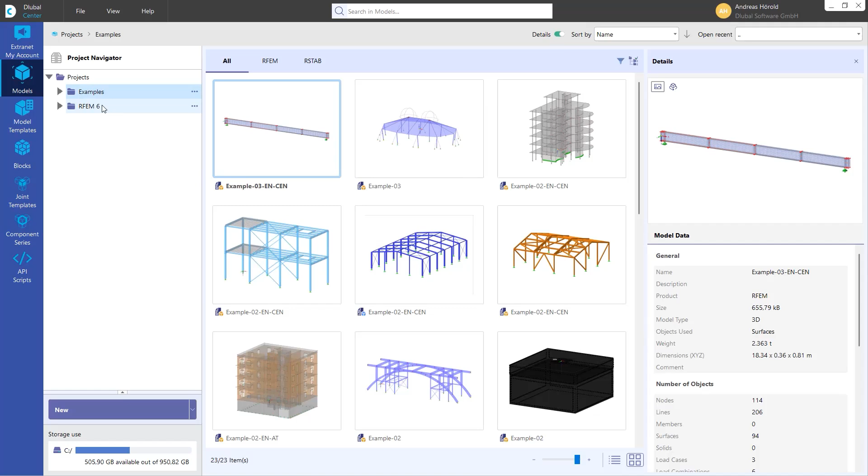The people who already work with RFEM 6 know that. I would like to give you some tips and an overview of how you can work with the Dlubal Center, and news on what we've implemented in the Dlubal Center.

Let's start with the models, the most important tool in the Dlubal Center to organize your projects. Let's create a new project with a right click on projects. I can create a new project. Let's call it example project.

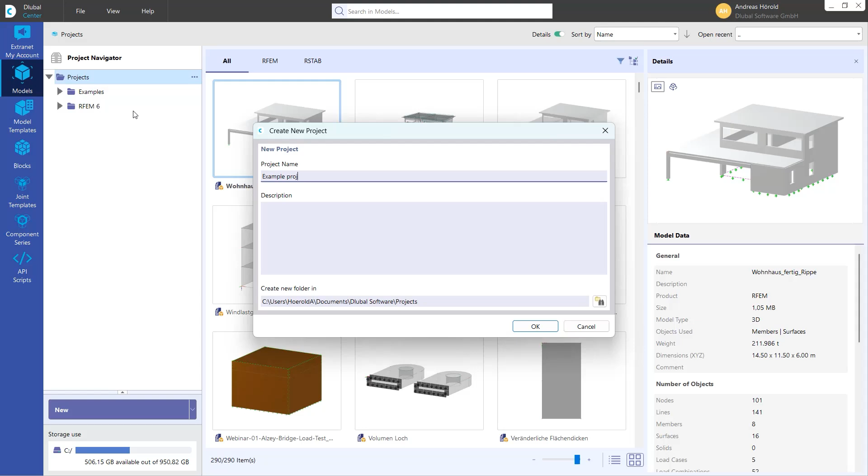Okay, that's the new project. And I would like to create a sub-project. Again, right-click on example project, then create new project, and the new project should be Model House 1. I can add a description here if I want.

So then, again, a right-click on Model House, and I create a new file, RFEM model in that case, and I call it House Variant 1.

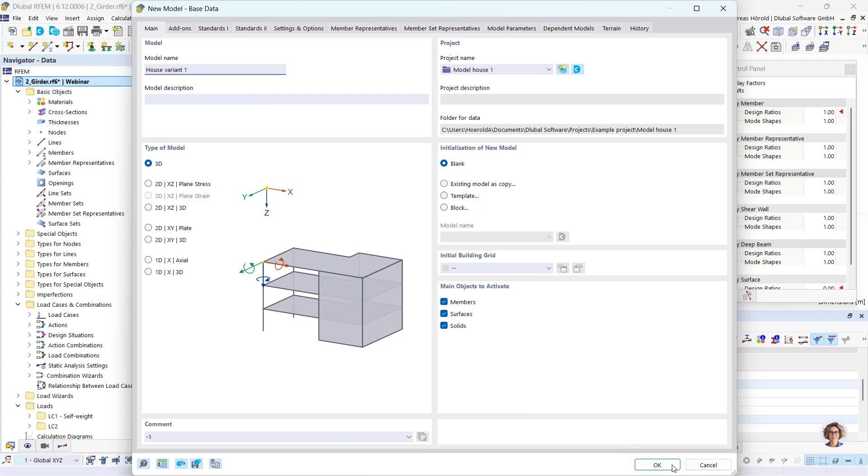Turn back to the Dlubal Center. Then you can see the file here. And if you switch to the list, you can add different columns here. For example, created in version, created by user, or I can remove them with a double click, and can add used add-ons or modified by company or created by company as you want.

Different types are available. Now you can see the added columns here. Okay, then I can open, for example, for the example project, with a right click, the folder location, and the Windows Explorer was opened.

And I can create a new folder also here. So with a right click, new folder, and I call it Model House 2. Okay, I decrease it a little bit so that we can see both.

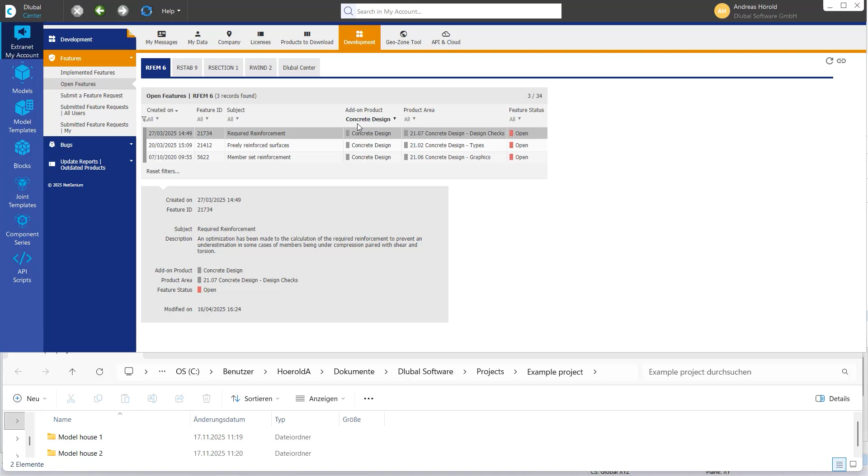Let's turn to the extranet and my account. So you can see the extranet messages here, or what's quite important, the development. You can see implemented features in a certain add-on, for example, or you can select all, then you can see all implemented features. You can see open features for certain products or all products. Then you can submit a feature request, and maybe it will be implemented in the future.

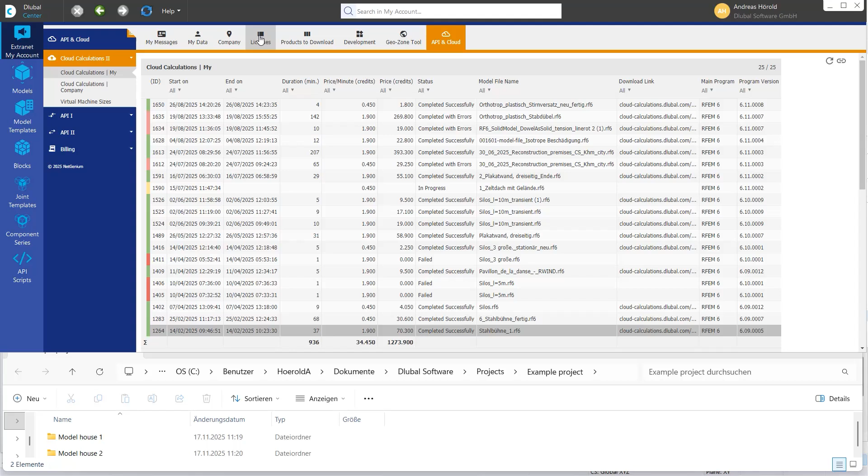Then, for example, you can see the GeoZone tool requests. Those are my requests in the past. Then the API and cloud, those are calculations from my side from the past. Then you can see here the data of you and of the company, your licenses, and so on.

Then we turn to the models and templates. The model templates category in the Dlubal Center provides an overview of the models you have saved as template files. In my case, it's empty. And an important message: the Save as Template function in the file menu in RFEM allows you to save your current model as a template.

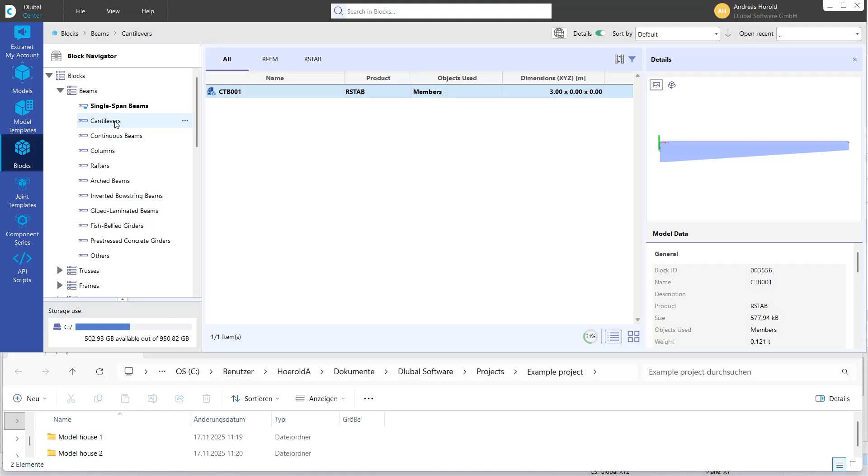Then you can see the blocks. Those are parameterized, and most of the models have parameters implemented. Let's go to this view, the tiles.

Simple models and more complex models, for example curved surfaces and concrete structures - a lot of blocks are available. Just use them, that's quite easy to handle.

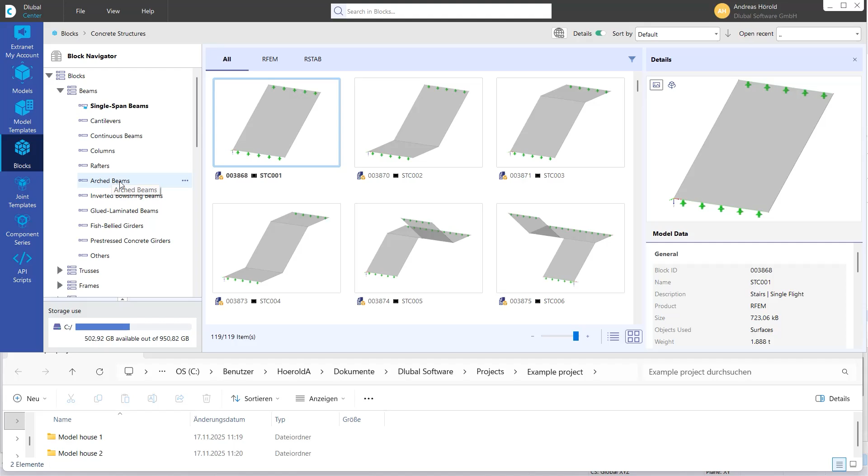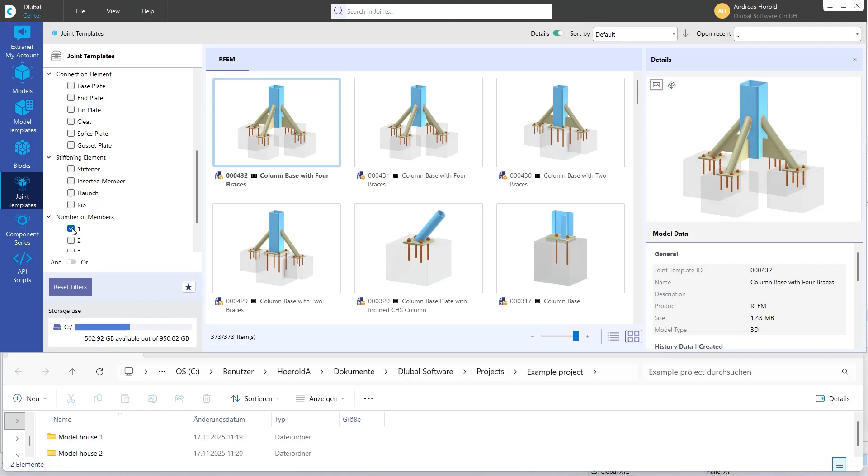Then the joint templates - you can select certain templates of joints. You can use it in the add-on, also in the steel joints add-on, for example also number of members, or joints with ribs, cleat, and so on.

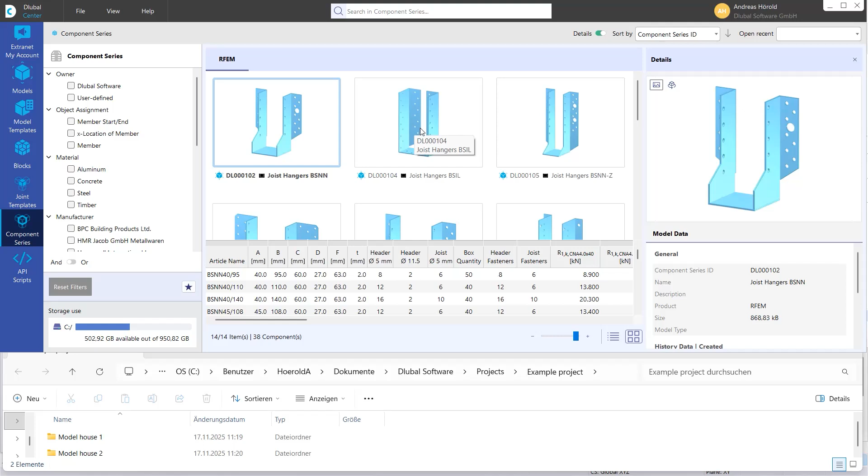Then that's a quite new part of the Dlubal Center, the component series. We are in development of the new add-on components. It's currently in alpha version, meaning it's in preparation, and in the future you can use the values of such joints and compare your internal forces with the maximum forces of the joint.

And API scripts - there are already sample scripts that you can also use for your project. Okay, that should be all for this question. Let's turn back to RFEM.

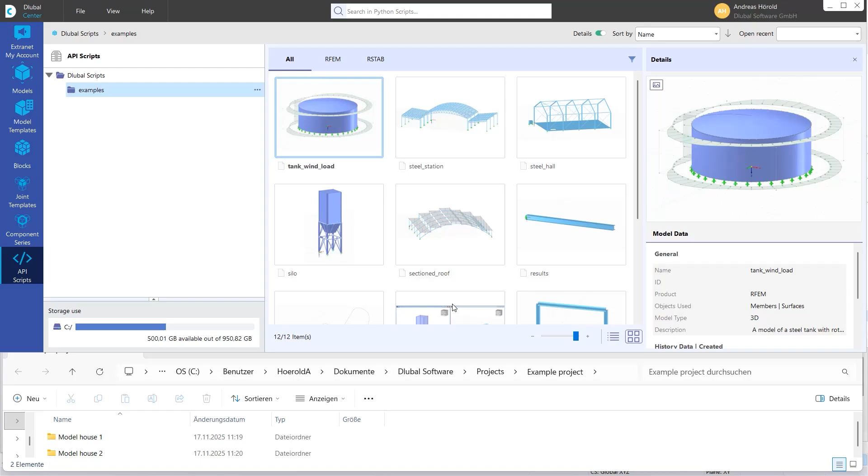The next question is: can I design longitudinal fillet welds according to Eurocode 3, Part 1-8 in RFEM 6? Yes, that's possible now. Soon we will release that feature, and I can show you how to do that. I've prepared a simple single span beam here made of a cross section HE.

180A. Imagine you need to use a girder with a maximum height of 175 millimeters. It's not possible, as you can see on the design ratio, with the HE 180A, and it's also not possible with an HE 180B. That's why we create a welded cross section.

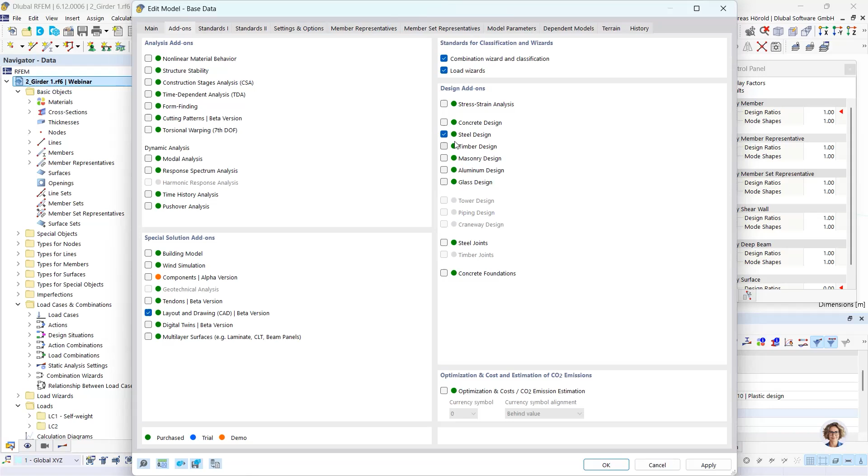At first, it's clear - I go back to the base data. It's necessary to activate the steel design for that feature. Then we create the welded section. I edit this used section.

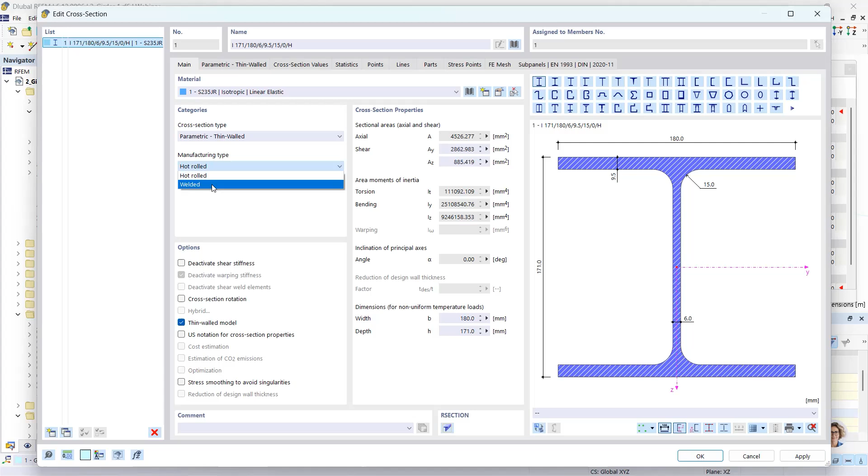I turn to the library above and I select thin-walled I section. So, before I enter the geometry, I go back to the main part here, main section, and I select here welded. Okay, then I enter the parameters.

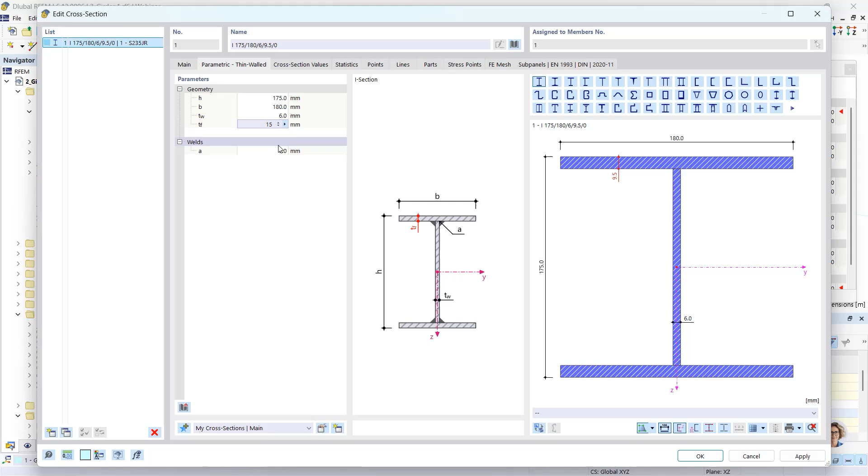Maximum height should be 175 millimeters. Then the other values can remain, but not the thickness of the flange - it should be 15 millimeters, and the weld should be 3 millimeters.

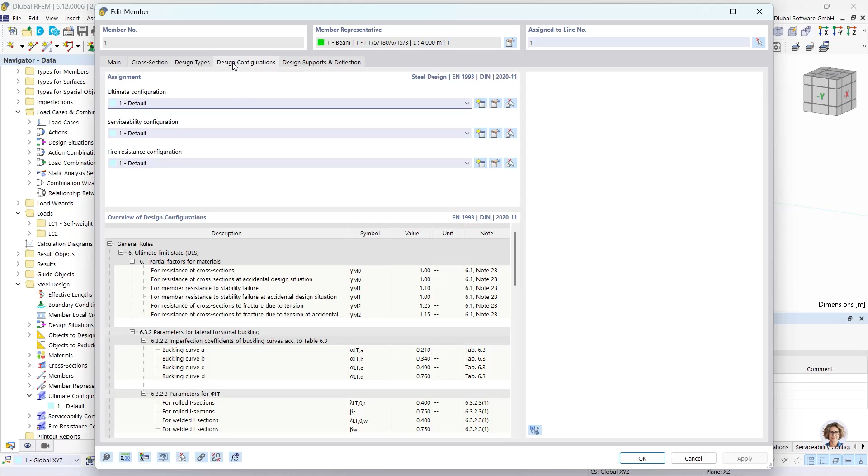Then I have to activate the weld design. I turn to the navigator data, then steel design and the ultimate configurations, default. I can turn to that chapter also when I use a double click on the beam. Then the design properties are activated and I can find the design configuration here, and I can edit it also with that button.

So then I have to activate the design of the longitudinal fillet welds. The correlation factor should be determined according to the Eurocode. It's dependent on the material, and in our case it should be 0.8 because we have material S235. And if you want, you can also use a user-defined correlation factor. In most cases, we will use the automatic data determination according to Eurocode.

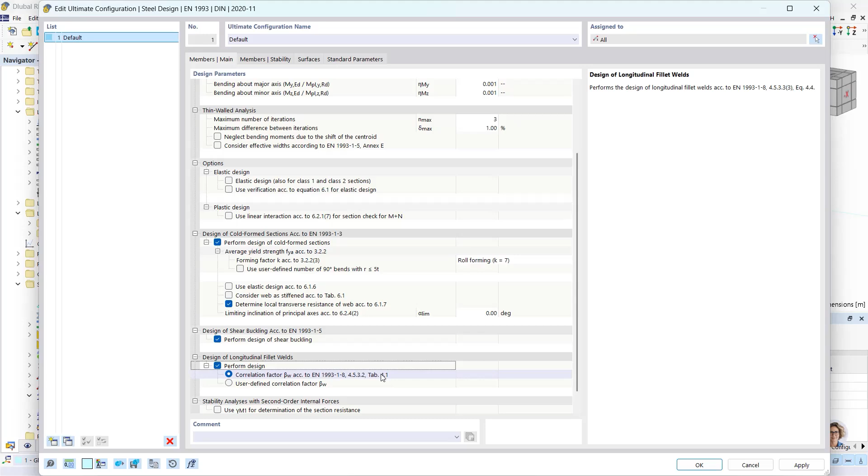Okay, so then I start the steel design again. So the combinations are calculated in parallel. Let's turn to the design ratios on members. And you can see there's an error.

If I double click on the line, the details are opened and you can see the throat thickness of one or more longitudinal fillet welds is smaller than the limit according to Eurocode 3. The program checks that automatically.

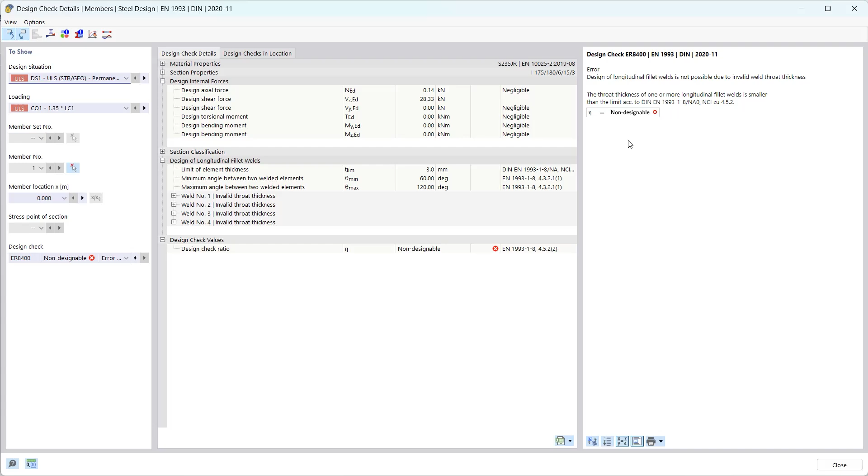In that case, the weld is too small, and we need to increase the weld. So I turn back to the navigator data and I do a double click on the cross section and I increase the weld to 4 millimeters. Okay, then I run the steel design again.

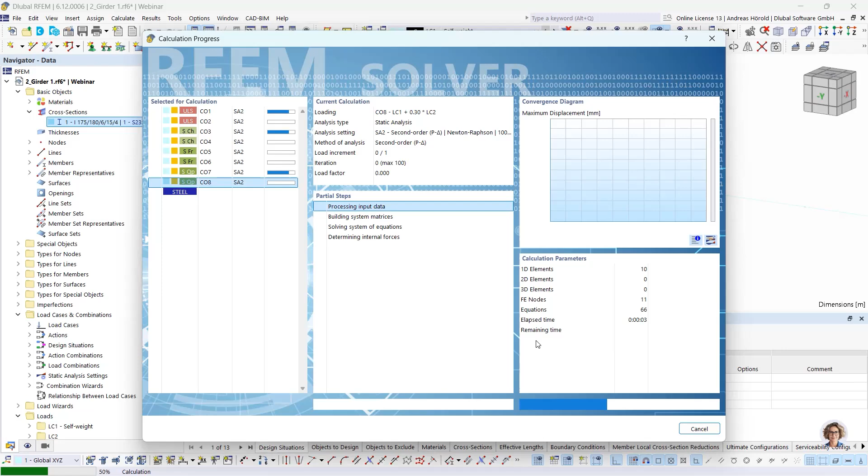So, and now the design of the weld is done. Double click on it and I can see the design checks. The 0.8 can be found here, the correlation factor, then the thickness of the weld, and the design check ratio is approximately 30%.

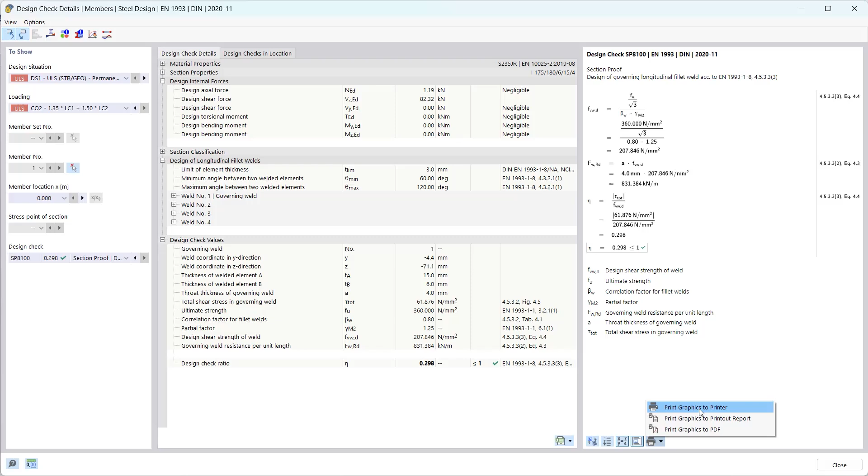And of course, you can also print the formulas and so on, on the printer or in the printout report. Okay, that should be all to this question and to this model.

The next question is: how can I smooth results in RFEM 6? That's an often asked question. You can do that with a surface results adjustment. In RFEM 5, we called it average region.

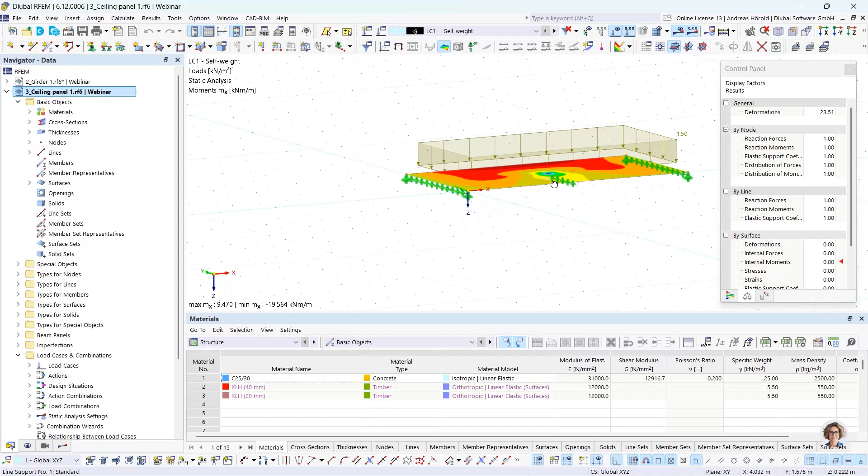Such a surface results adjustment describes an area in the model whose graphical results are not represented by the actual diagrams, but as mean values. You can use a user-defined adjustment area to evaluate the smoothed surface internal forces. You can see that ceiling panel here and a wall here. Imagine it has a thickness of 20 centimeters.

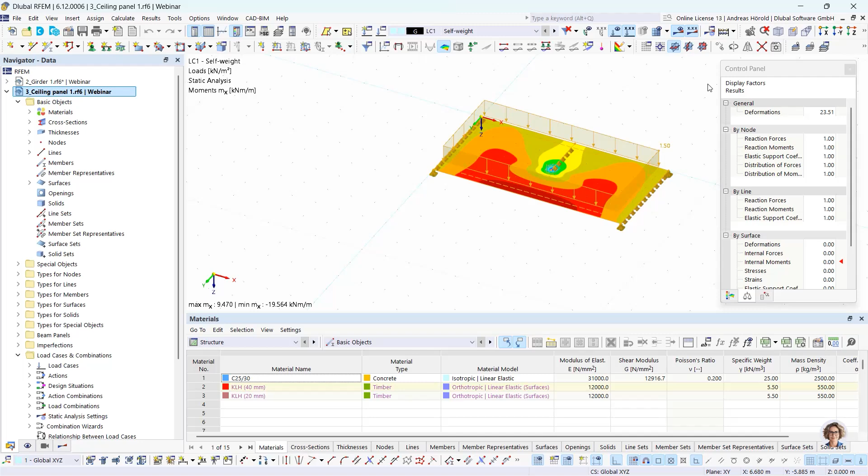And you can see there are singularities at the end of the wall here. So we would like to use such a surface results adjustment to smooth the results. So to compare the results, I copy that ceiling panel, select all, then I use the move and copy function, create a copy.

6 meters in Y direction, and including loading. Okay.

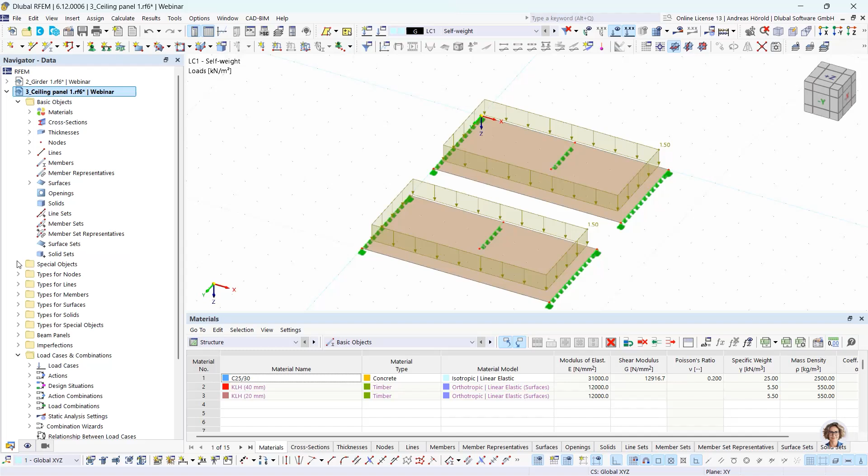So then I turn to the navigator data, and under special objects, you can find the surface results adjustment. You can also find it in the menu under Insert, Special Objects, Surface Results Adjustments, and I open the dialog box.

At first, I have to assign a surface. Then you can select different shapes here: rectangle, circle, ellipse, and polygon. I use rectangle. The dimensions in our case should be 20 by 20 centimeters. And I select the node.

So, to define the position correctly, I move it to 10 centimeters to depict the wall end correctly.

Then there are different adjustment types. The default setting is for direction U, averaging of MY, MXY, and so on, for basic internal forces in surface direction Y. The second line here is the default setting for basic internal forces in surface direction X.

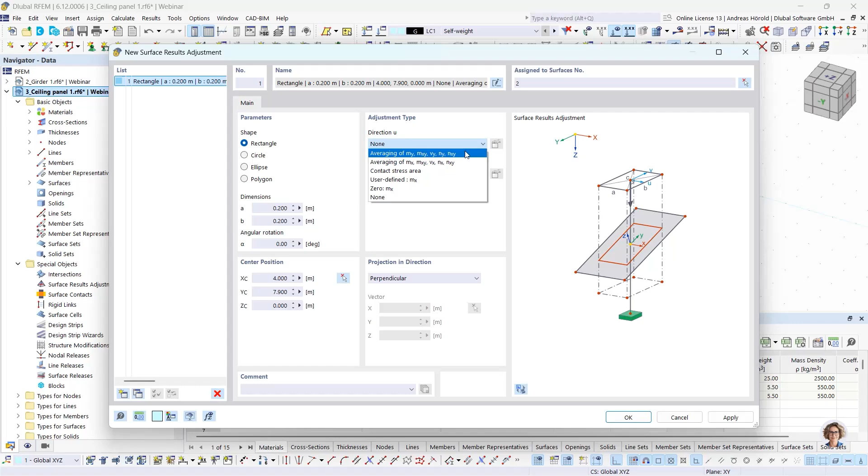So I use the default setting, press OK, and then we calculate all again.

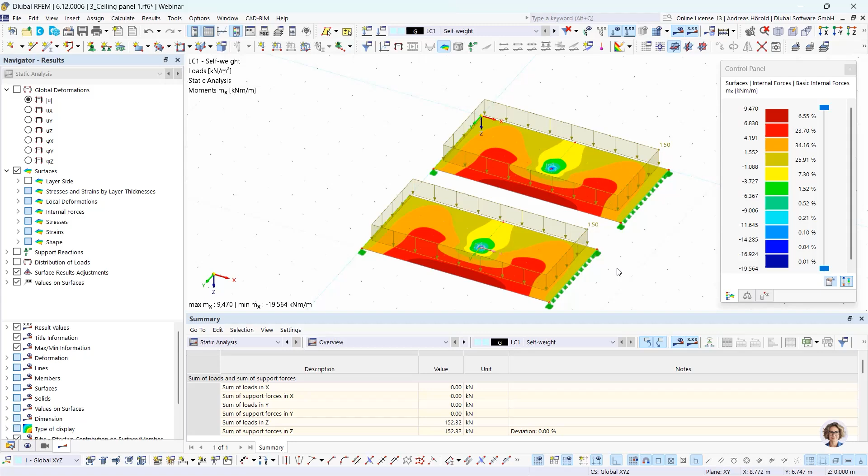And if I want to see what the maximum value is here, I can, for example, deselect that slab and hide selected objects. Now the maximum value is minus 16. That's the possibility to smooth results in RFEM 6.

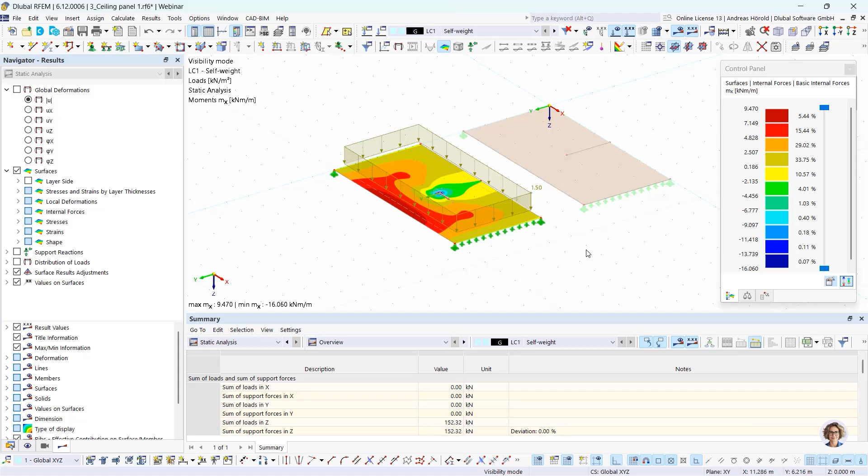Thank you, Andreas. I will continue with the next topic. The next question is, where can I find specific RWIND settings in RFEM 6.12 and later?

As you have maybe already realized, we changed the GUI in RFEM 6 a bit to be able to hand over more data to RWIND with the GUI in RFEM 6 without stepping directly into RWIND. Let's start with the basics.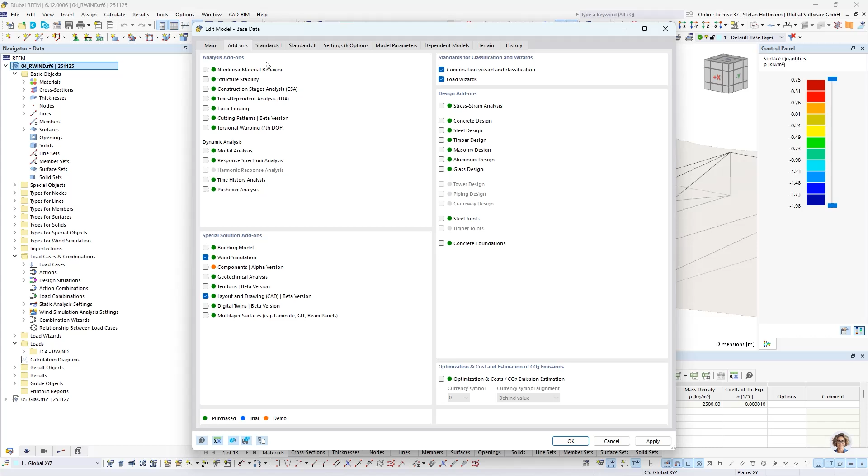Usually at first you activate the add-on wind simulation, and you can choose the standard group for your wind profile in order to determine your automatic wind profile for your region.

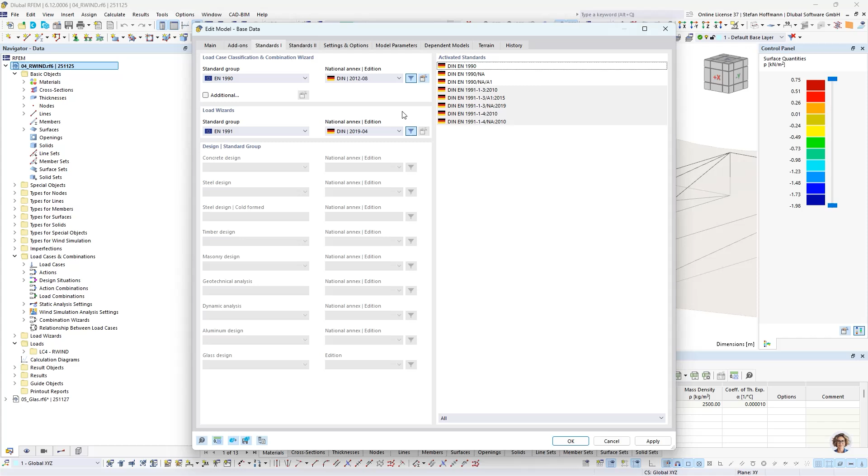If you're already interested in adding a terrain to represent the location-specific behavior of the wind, maybe due to trees or mountains, you can activate a terrain in the base data terrain settings. You can choose between no terrain, a horizontal plane, an inclined plane, table values, or, as I am using — and this is most likely also the first change — an IFC file model objects.

So this is no longer found in the mesh settings to adjust the IFC as a terrain; you now input it as the base data in the terrain tab. I'm simply using an IFC file where I've modeled a simple shape of my terrain, and you can do some more inputs on the size of your terrain already here.

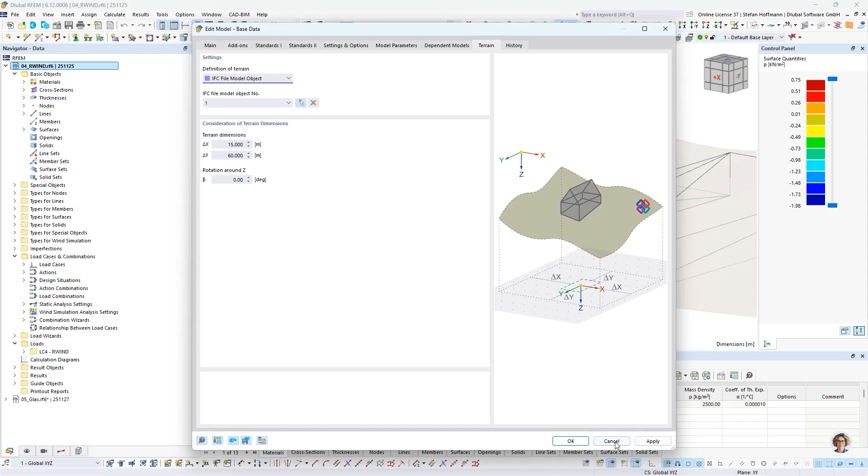So if we jump into the model, you already know that in the mesh settings you have a wind simulation tab, and for regular customers you'll realize this tab has changed a lot in the GUI. We moved some parts, and you now have the option to assign objects from shrink wrapping.

So the shrink wrapping mesh, which is later necessary for the calculation in RWIND, needs to be assigned to your main structure or surrounding objects. You can already split this over here, but also later in the objects. This is currently not in use.

You can also choose to activate the terrain, which we set in the base data, to be considered for the calculation. You can jump into the base data as well. You can, as already known, adjust the level of detail for your members, and choose to close hollow sections.

You can consider a surface thickness in general, and there are the two known options: to keep RWIND results if the mesh is deleted, or to run RWIND in silent mode.

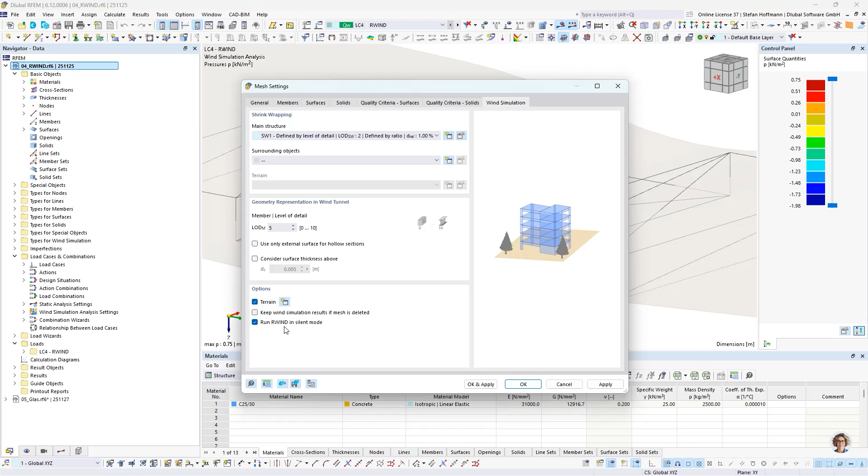As known, you also have settings in the load cases from the analysis type wind simulation. If we jump into the tab, this hasn't changed a lot. You can assign wind simulation analysis settings, where you can, for example, differ between steady flow and transient flow.

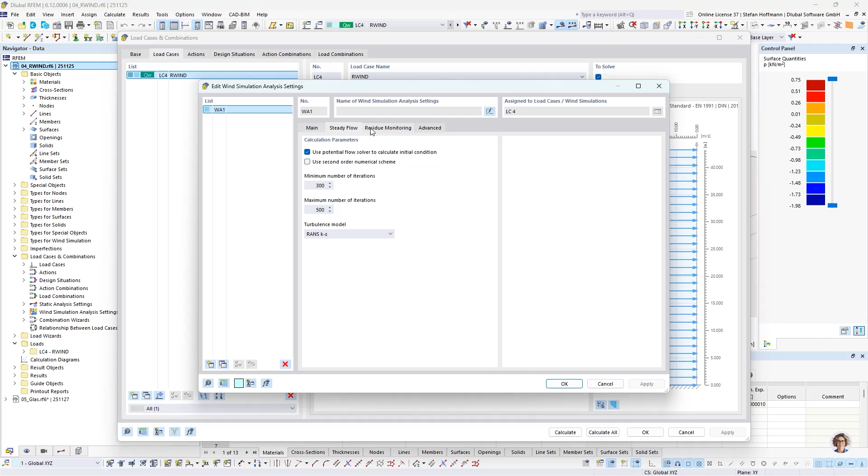You can hit some more options to be handed over to RWIND. You can also step into the tabs to add more input for the wind tunnel. The wind profile did not change from my point of view, so you can simply assign a wind profile according to a standard and hand this over to RWIND directly. Some more checkboxes at the bottom — everything is usually explained in more detail in our online manual.

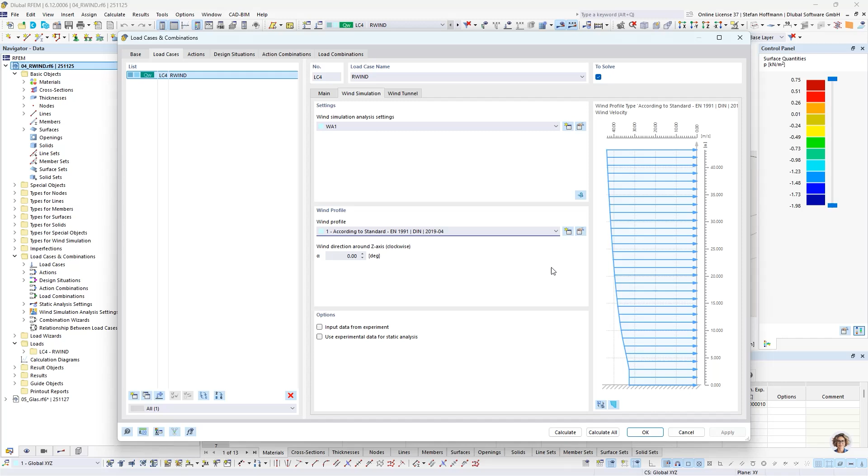The biggest change, in contrast to the mesh settings, is now that every object, if you click, for example, on one surface, has a specific wind simulation setting which you can activate. And if you see this tab, you can see that you can now assign different shrink wrapping settings for surfaces.

So if you have maybe a small surface, you can assign an even finer mesh later on because you are interested maybe in facade engineering and some results on this point. And if you have a bigger surface, which is not of most interest, you can assign a coarser mesh. You can also define the roughness and permeability as an object.

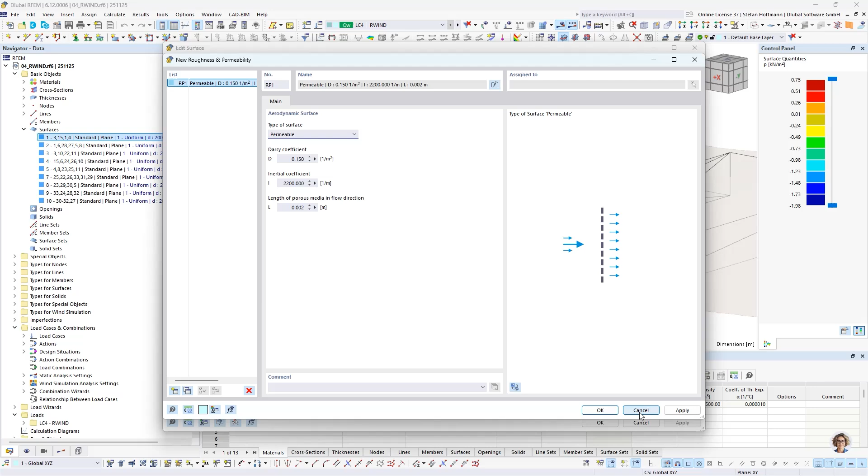So as you are maybe used to already in RWIND, you can use a closed surface and enter some permeable options for it, so that the mesh will not be fine, but it will be considered as permeability later on. You can also check to consider surface thickness above, and another interesting option is that you can simply also exclude this object from the wind tunnel.

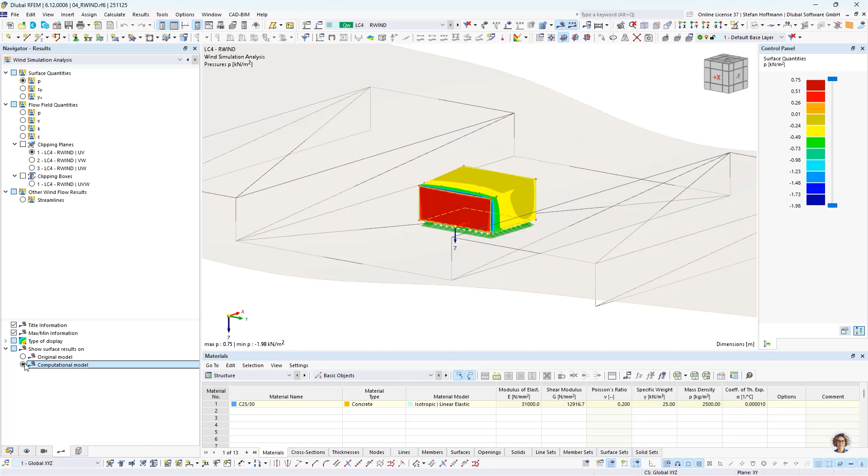I think what we did not change is that you have, of course, your wind simulation analysis results, and you can still split to show it on the original model and/or the computational model. We will step to the next question.

The next question is, can I control the shear coupling for laminated glass in RFEM 6? So usually, of course, having laminated glass, the shear coupling is quite of interest, because if you have a layered plane where you have two panels of glass and one foil in the middle, then one worst case is that you do not take the shear coupling into account, having big deformations, having stresses only in the glass planes, but it might also be of interest.

That is why we use laminated glass, that you can take into consideration the shear coupling. Sometimes you are allowed to do this. And just with regards to the German standard DIN 18008-1, it offers two requirements in chapter 7.2.1. It mentions when determining the stress and deformation of laminated glass and laminated safety glass, favorable shear coupling between the individual panes must not be assumed.

But in the next chapter, 7.2.2, in the case of an unfavorable shear coupling, e.g. in the case of restrained stresses, full shear coupling must be assumed. So you usually have to consider both states doing your calculations. Sometimes, of course, it's not every time common sense that you can see the effect of the shear coupling just from your engineer's point of view, but it's quite easy, and we will show it in this model.

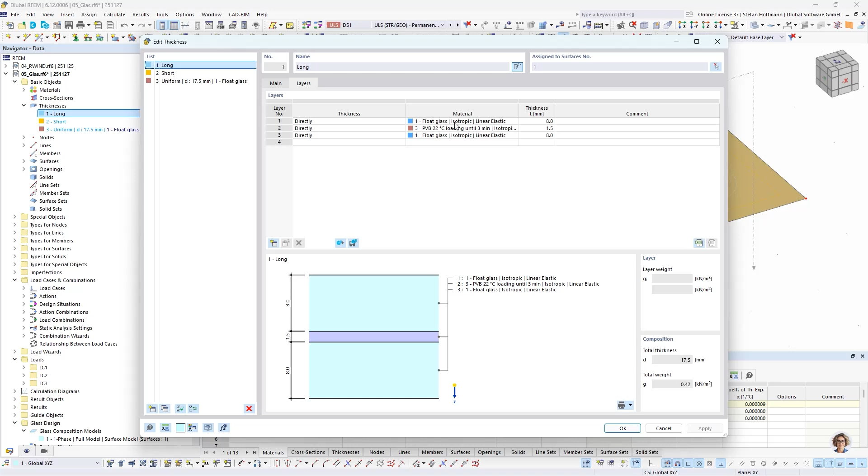So first, a quick look at our model. It's a glass pane with 4 point supports, and I have created a thickness from the type glass composition. I have 3 layers, 2 times float glass, 8 millimeters, and 1 foil in the middle. You can use the foil, of course, with material values from our material library. I'm using a foil with a load under 3 minutes, so the E modulus will already change for our foil layer. And this is my glass composition.

For the calculation, you have to assign, or it usually automatically assigns the first one, a glass composition model, where you can later on also choose a solid model, where you can then take into account also insulated glazing. But currently you can differ between coupled and uncoupled shear coupling between the glass layers. So I have defined uncoupled, so there is no shear coupling in my main model.

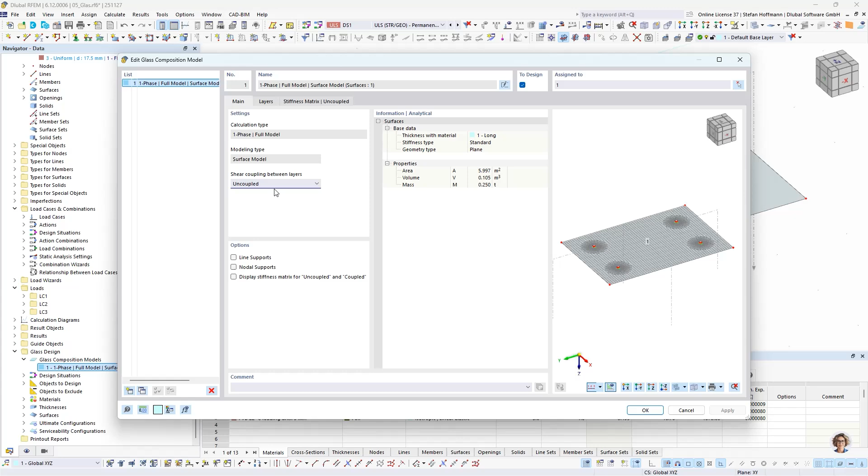So how to consider both shear couplings? It's quite easy in RFEM 6. So we do this checking our design situations. And once you check glass design, you can see a further added option at the bottom in the design situations. It mentions inverse shear coupling between layers for surfaces with glass compositions. So let's remember, we have a glass composition model without shear coupling.

So for every load combination in design situation 1, if we do not check this checkbox, this is uncoupled. And we can simply copy this design situation and check this checkbox for the same load combinations, where we will then take into consideration the full shear coupling. Just by simply adding an option, load combinations will be calculated automatically.

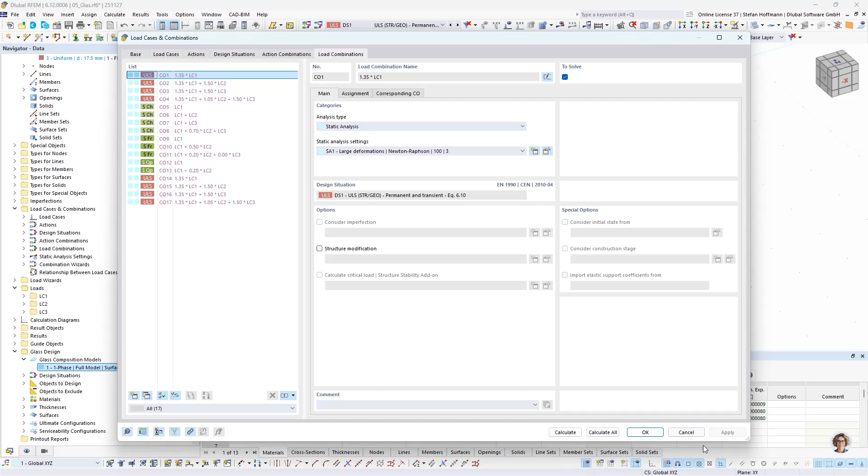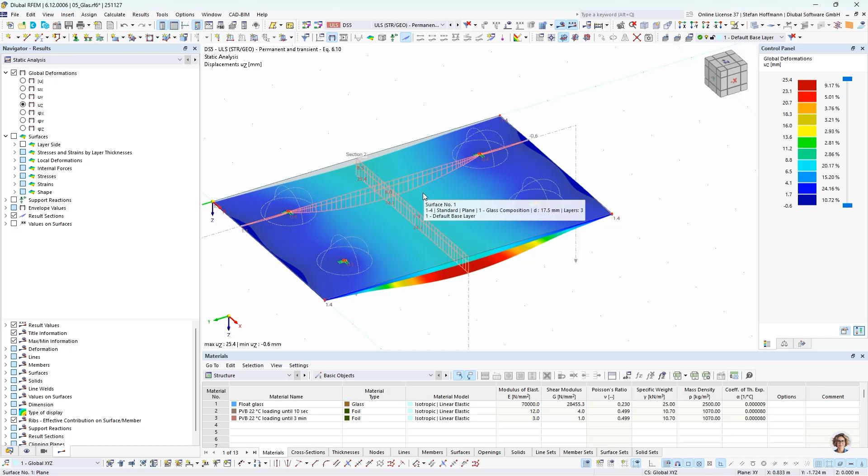So once we step quickly into our design situation 1, no shear coupling, we have a maximum deformation of 50 millimeters approximately. And if we step into the one with full shear coupling, the deformation, of course, reduces as expected, related to the theory behind for our 2D stiffness. And I think the most interesting part is, of course, then later on the glass design.

I have done 2 sections through the model, and we are, of course, above our design ratio, so we would have to adjust our model, but mainly, not taking into consideration the shear coupling, we would expect on point supports to have the biggest ratio in the middle of the field, but this would decrease once we can take into consideration the shear coupling.

But this usually affects our support points with the point supports, in that the stress ratio may increase. So it's not only in the case of restrained stresses, but from my understanding and experience, you can also expect that the stresses may increase with a full shear coupling at the place of point supports. You can take this into consideration by simply activating this option in the design situation.

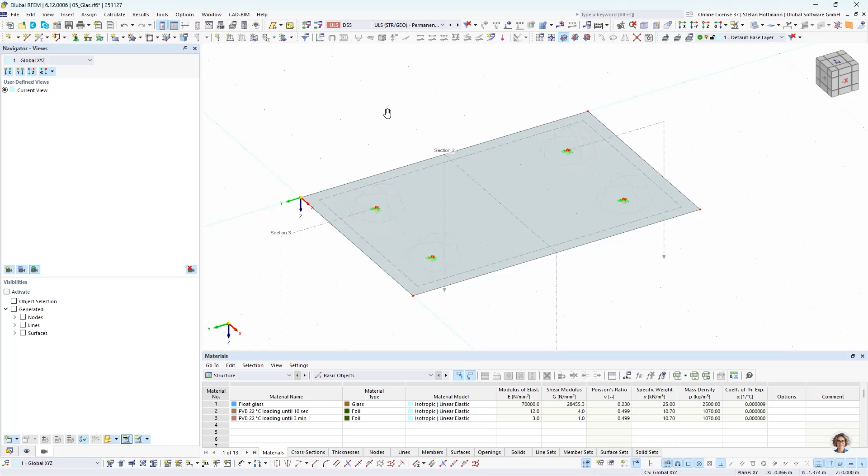Let's step to the last question for today. We will stay in the model. The last question is: my mouse is not working as usual, what can I do? Let's reflect on the mouse function. With the left mouse, you can select items. With the mouse wheel pressed down, you can pan. With the right mouse, you usually get a context menu with some options. If you hit Control on the keyboard and press the middle mouse button, then you can rotate.

If you select a node or object before and hit the Alt key and press the middle mouse button, you can rotate around that object. And you can move, of course, with the middle mouse. And what happens if you only have a mouse with one key, or if you are sitting at your laptop where you do not have a middle mouse button? We introduced this option over here to move, zoom, rotate. If you activate this, the mouse action will change.

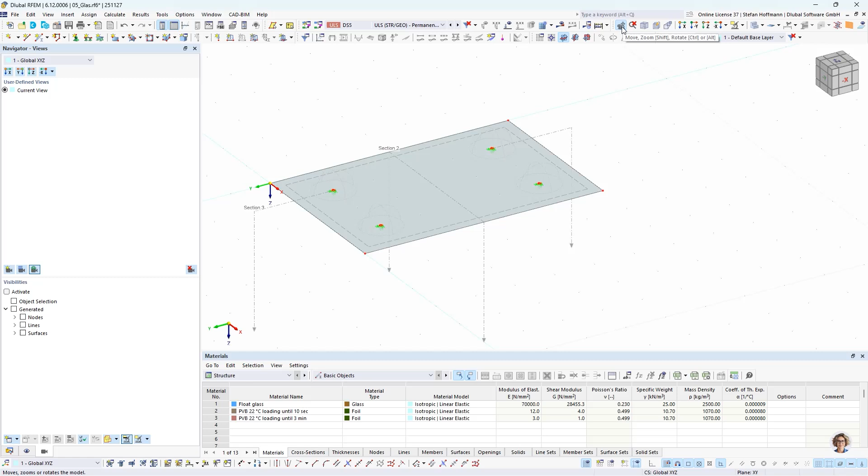So with left mouse clicking, you can move. Holding Shift, you can zoom by moving the mouse and clicking the left mouse button. And with Control or Alt, you can rotate by simply clicking the left mouse button. So if you would like to select something and it's not working, just remember that this option might be active, and it also affects the view cube, so it's not fully functioning anymore. If you are a bit confused, remember this option, uncheck it, and you have your normal mouse options back again.

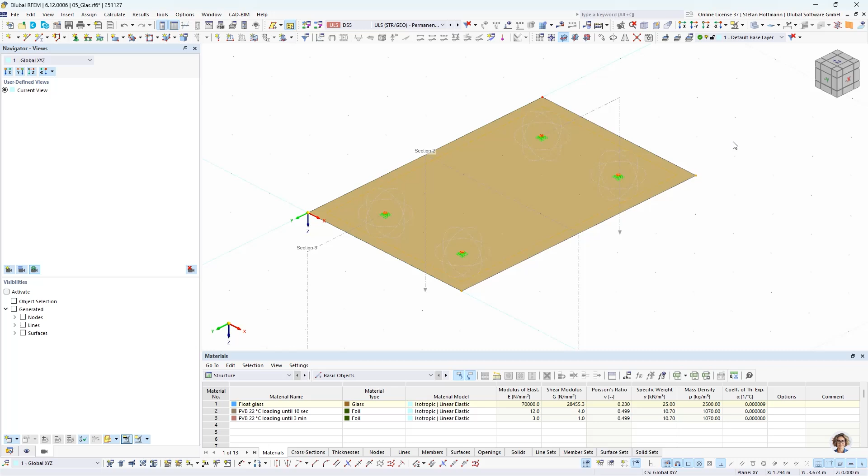What I would like to add is the function over here to add something to the selection or create a new selection. Usually you can mark the surface, hit the Control key, and add more objects into the selection. But if you do not want to do this, you can check this button and click objects one after another. But this may cause trouble if you do not remember you activated it, because then a left click will not undo the selection. You have to press Escape.

The last two buttons I would like to add to this topic are these two. Both allow interaction between the model and the table. As we had in the glass design, if you have results and you click in one row, you will see a red arrow pointing at the place. If this is not the case, or if you click on one node and it is not highlighted in the table, then simply remember both buttons; they could be the reason why it is not highlighted, and vice versa.